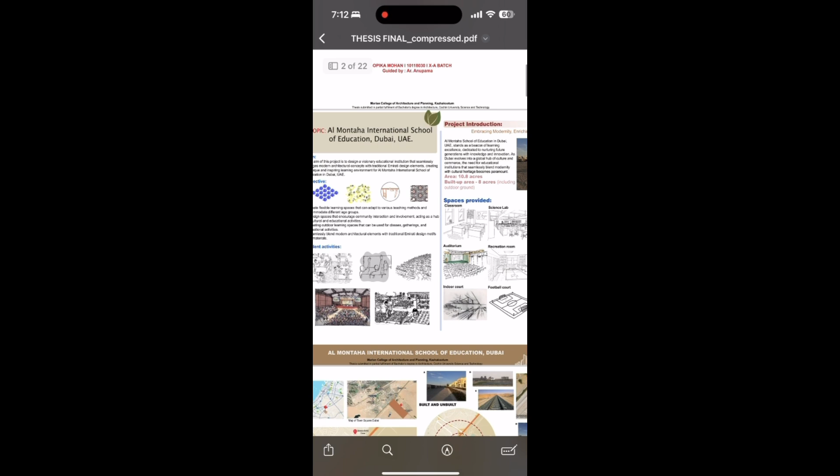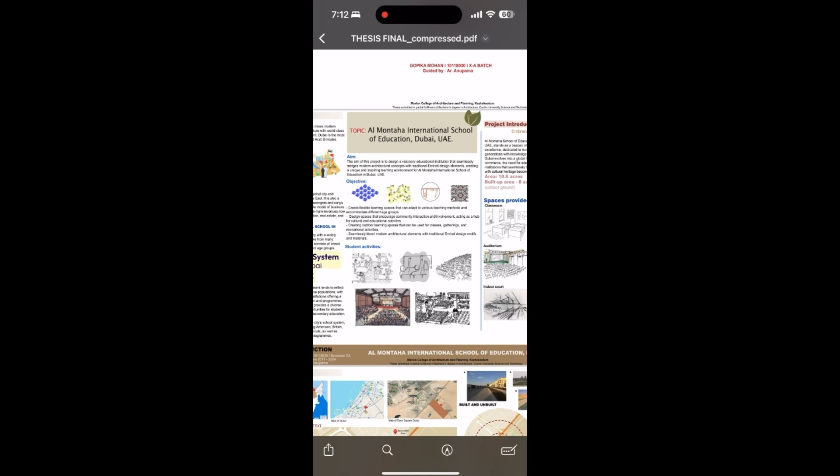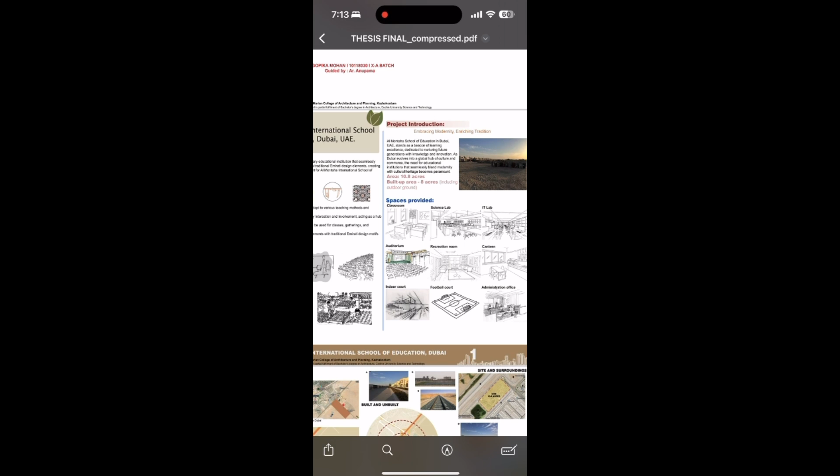In my project introduction, there are student activities going to the auditorium, doing curricular activities, extracurricular activities, sports activities, etc. My site is basically located in Town Square, Dubai, with an area of 10.8 acres, which can have a built up area of 8 acres including the outdoor ground. The spaces I'm going to provide are classroom, science lab, auditorium, etc., because these are necessary spaces for schools generally, as stated in the Dubai municipality rules.

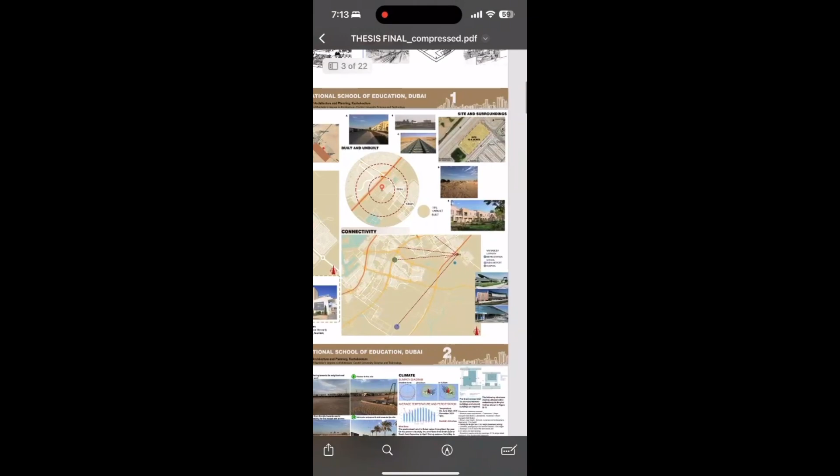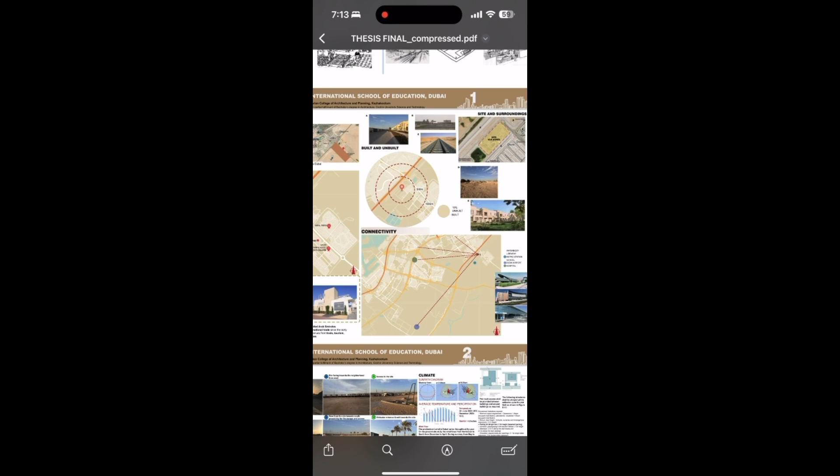Going to my site, as I mentioned, it is in Town Square, Dubai. There are two neighboring areas, that is schools with community villas and neighboring schools. My neighboring school is Southview School, Dubai, and the connectivity is really limited because the area is actually away from main Dubai. In future it will expand, and Town Square Dubai will be part of the main Dubai business.

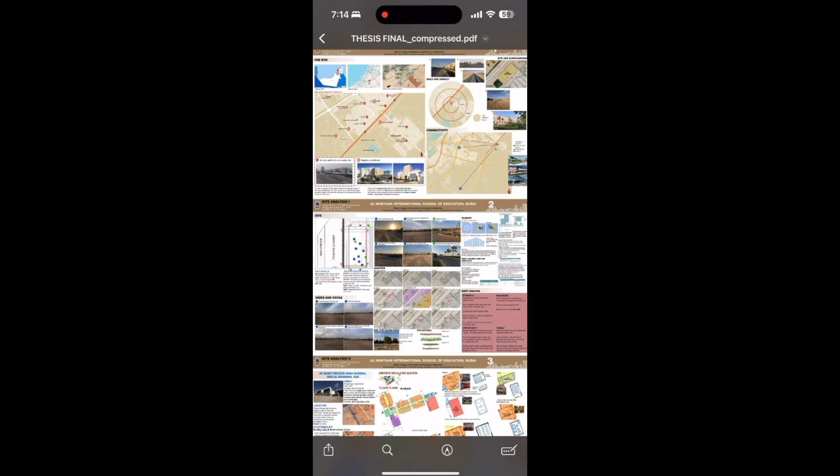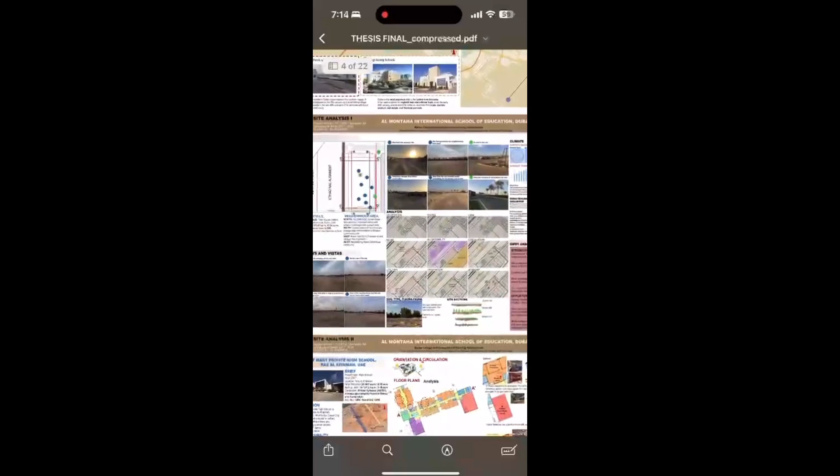Going with the site, my site is of 10.8 acres, and I have used 13,000 square meters of the building. Then I have done views and vistas, taking photos from the site. It is actually barren land, used as a temporary land for storing equipment, etc., even waste, though not too much.

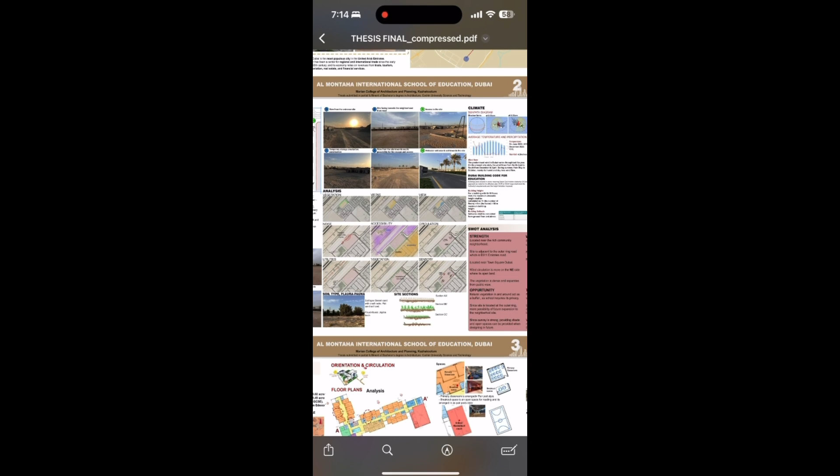My analysis is through vegetation, vistas, activities, etc., and the soil type is desert sand with small rocks, and the flora fauna is jojoba, the bush.

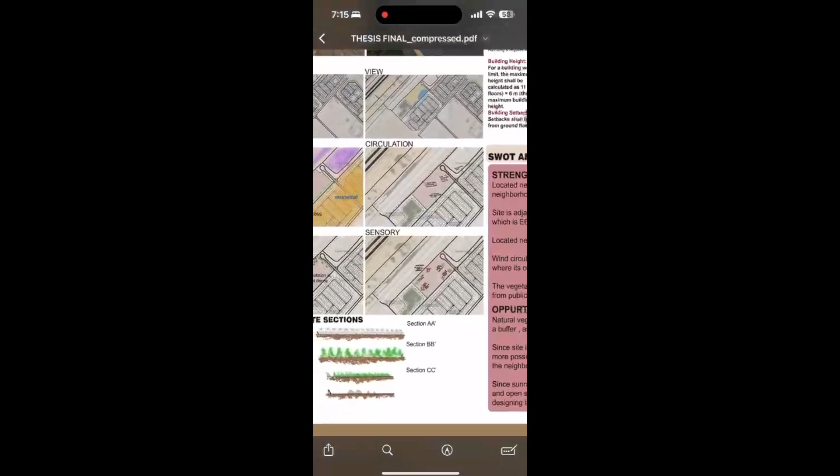These are my site sections, and the weakness or threat I have found is the noise from the east side, because on the east side is the main road, so we can hear the cars going here and there since it's the main road. In order to prevent that, we can do a lot of vegetation growing around, give possible future expansion on the neighborhood side, and also provide shade and open spaces to reduce the sun and the heat.

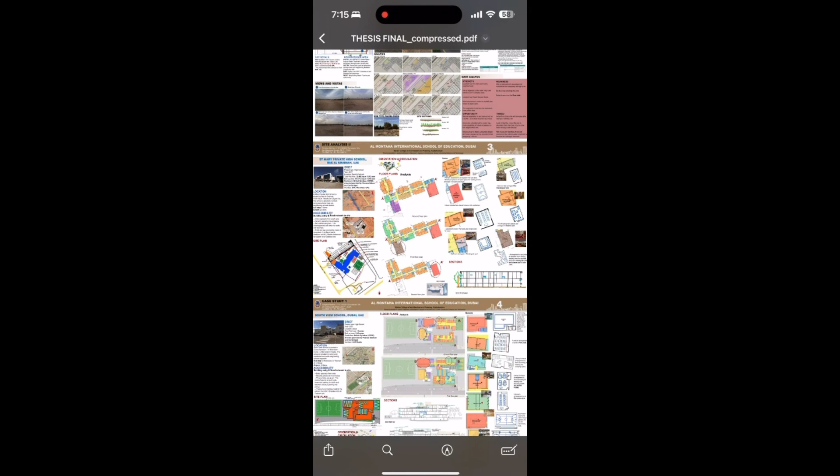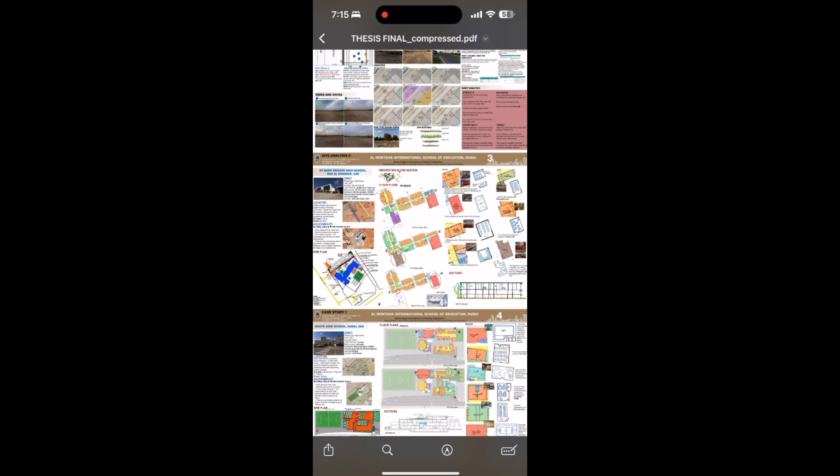So I have done two live case studies, that is St. Mary Private School in Ras Al Khaimah, and Southview School, Dubai, which is a neighboring school. From these two schools I have learned the spaces which are used, how many students can be sitting, how the furniture is arranged, and how the rooms are arranged according to class wise, age wise, etc.

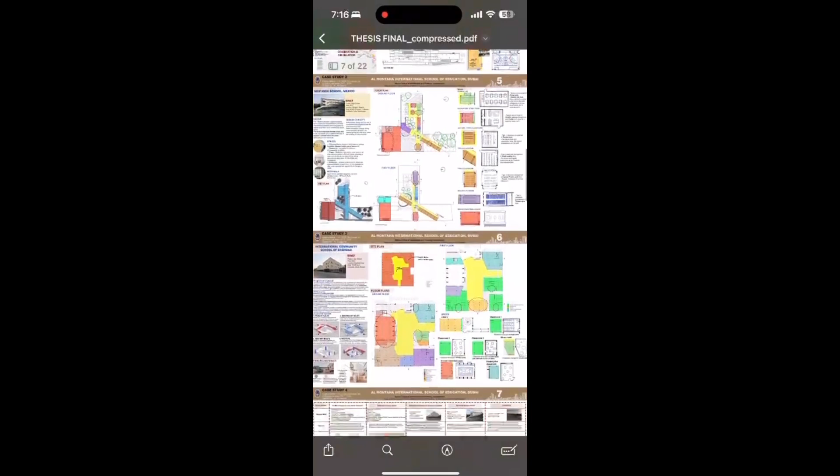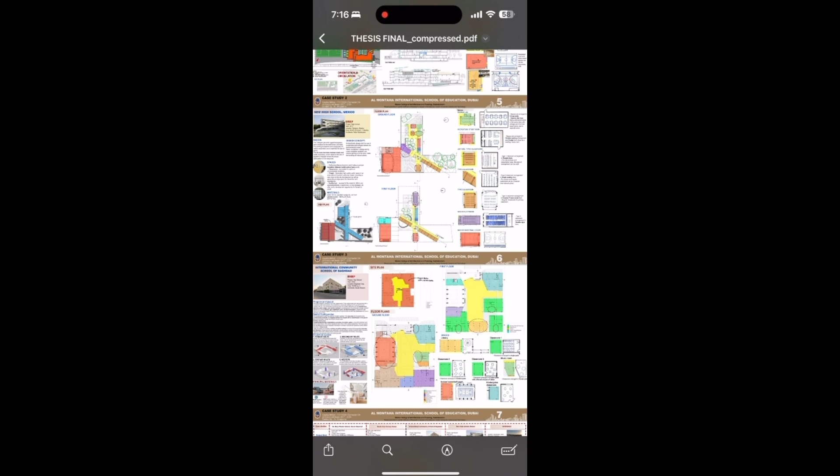Then comes the international community. I have done literature case studies on New High School, Mexico, and the international community, learning about the spaces and how the building is built up with the concepts. And then I have done the comparative analysis on all four of them.

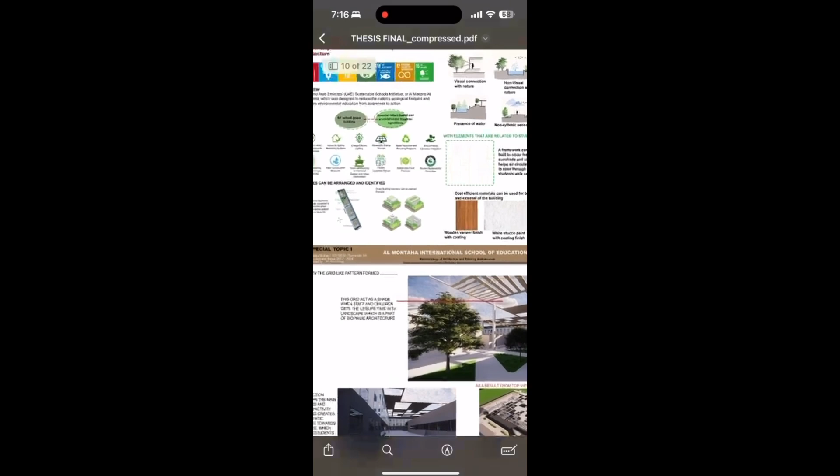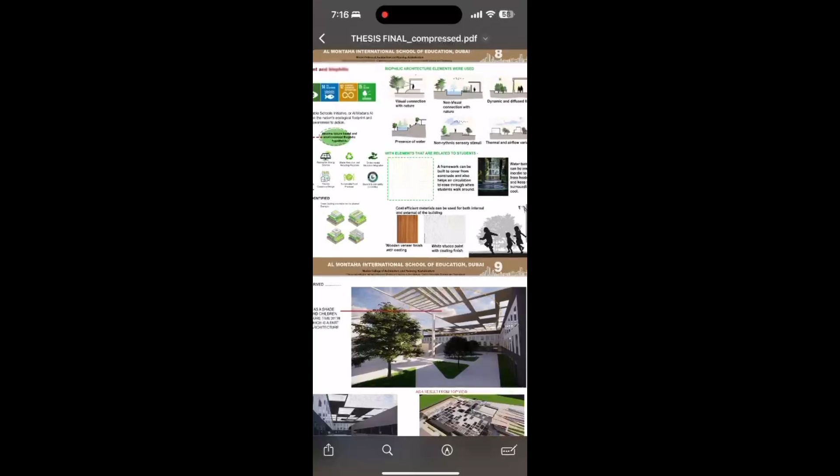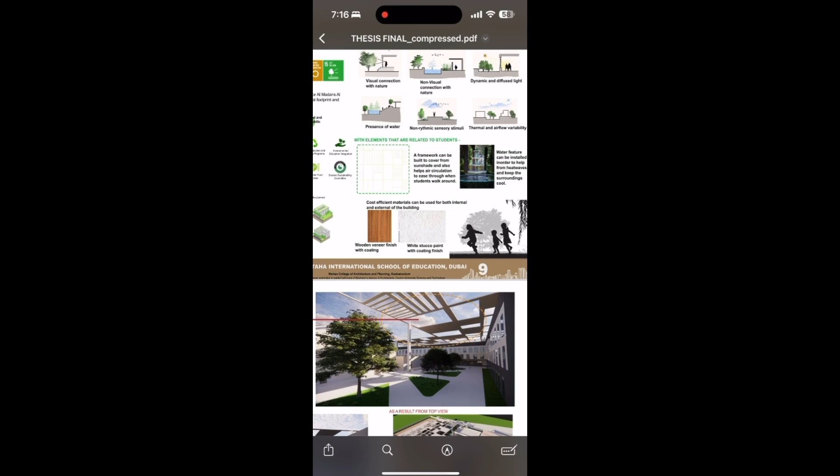Then comes my special topic, which is the relationship between student and biophilic architecture. For the relationship between these two, I have come up with an element which coincides with biophilic architecture elements. It is about using a framework which is a big pergola frame to help students interact with each other and get connected with nature and the surroundings.

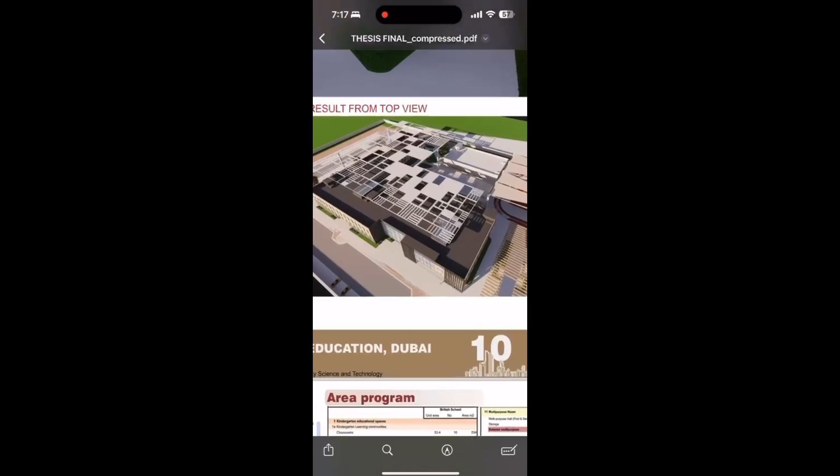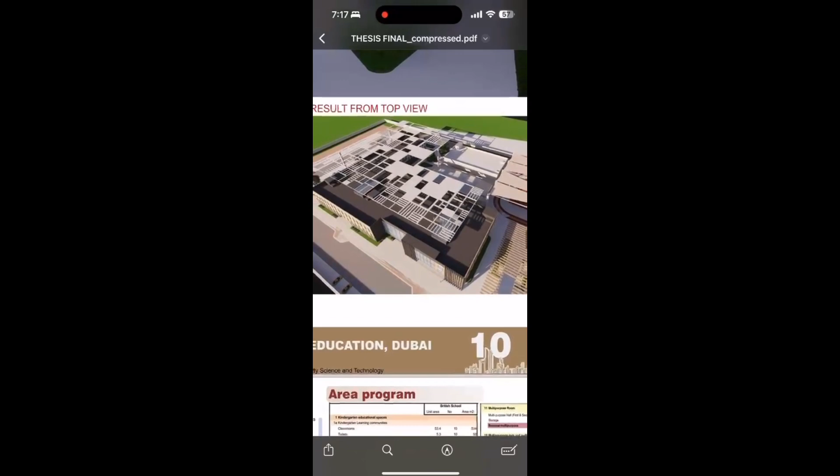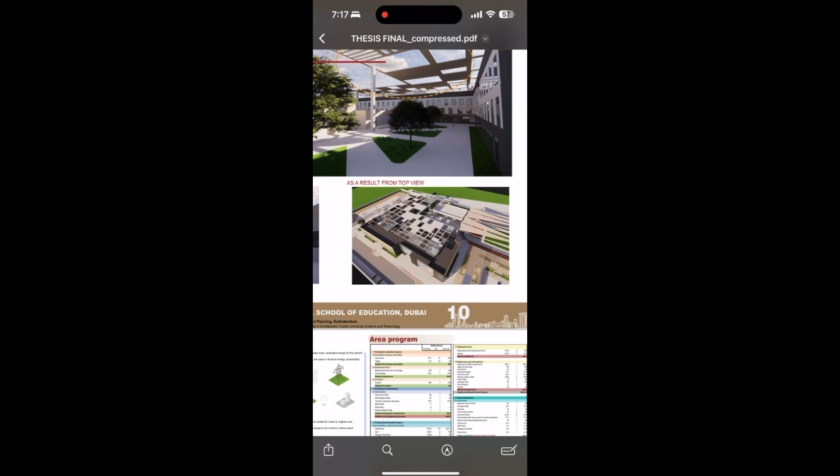In the model that I made, this is the framework that I have used. With this framework, it blocks the sun shade and brings cool air through the hollows that have been made to block the hot air and give cool air in between, because the wind is coming from northeast and northwest. So this is my special topic.

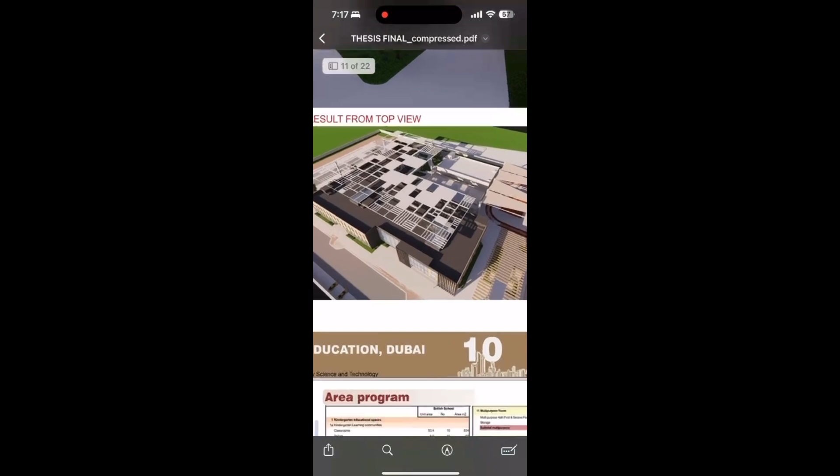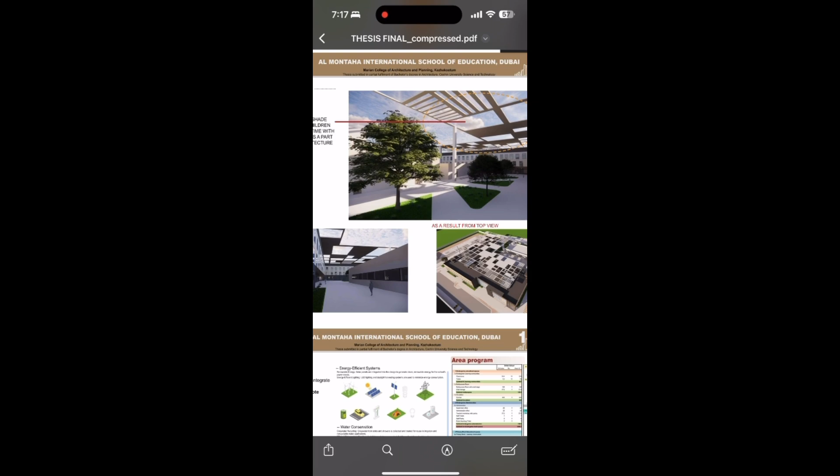So students will actually get interested in being at the center of the core, since it's at the core area, and also the nature blends with it. So students will love to have a leisure time, and not just students, even the teachers will also love to have a leisure time with their students, and students can also have their recess time.

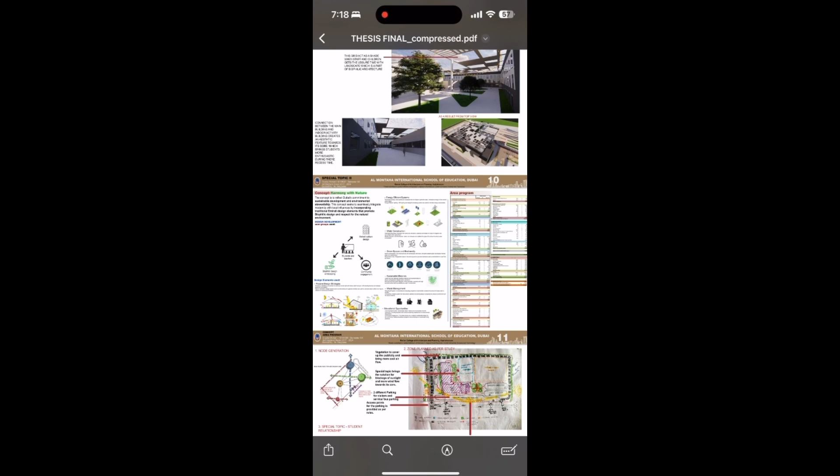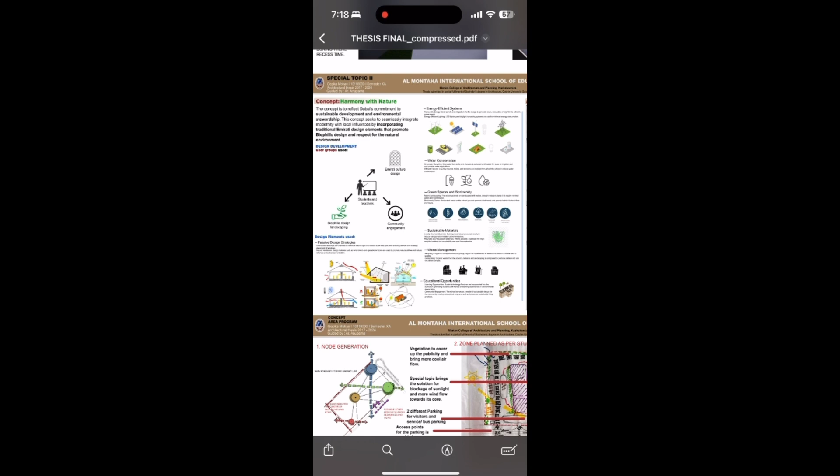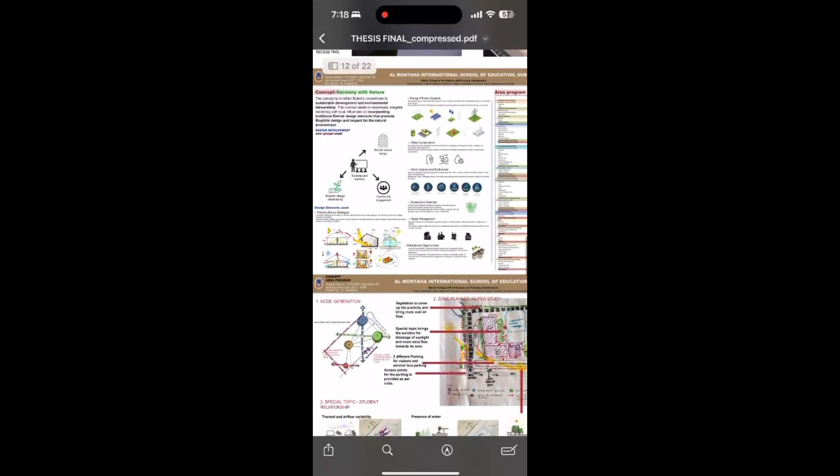And my concept is about harmony with nature. Since it's harmony with nature, I've used design elements, that is the passive design, the sustainable design, green spaces, water conservation, energy efficient systems. Since the building is fully air conditioned with HVAC, certain rules have been taken up, and it is mentioned in the data collection.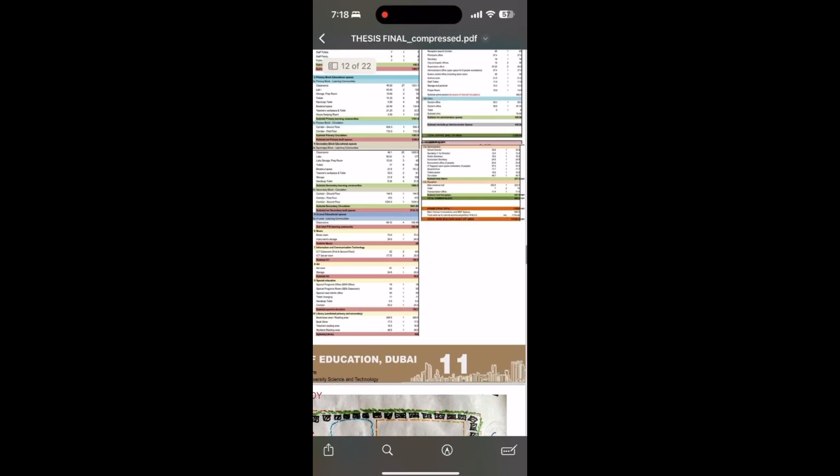And my area program, as I have said before, it is 13,000. I have used the built up area as more than 13,000.

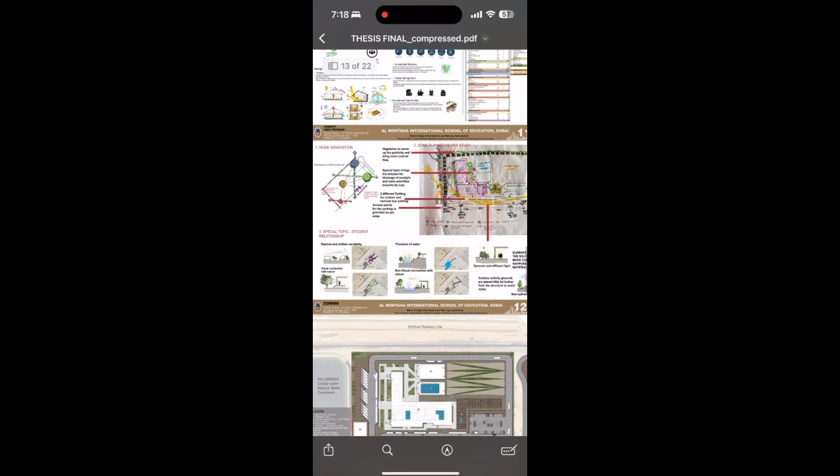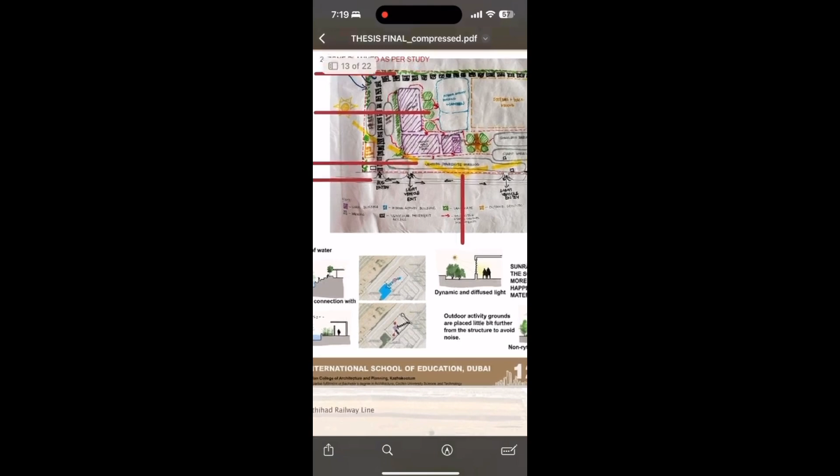And then comes my zoning. So during zoning, this is my node generation. I found that the core area is where students and teachers can have the time, and also use a special topic to bring the blockage of sunlight and heat waves.

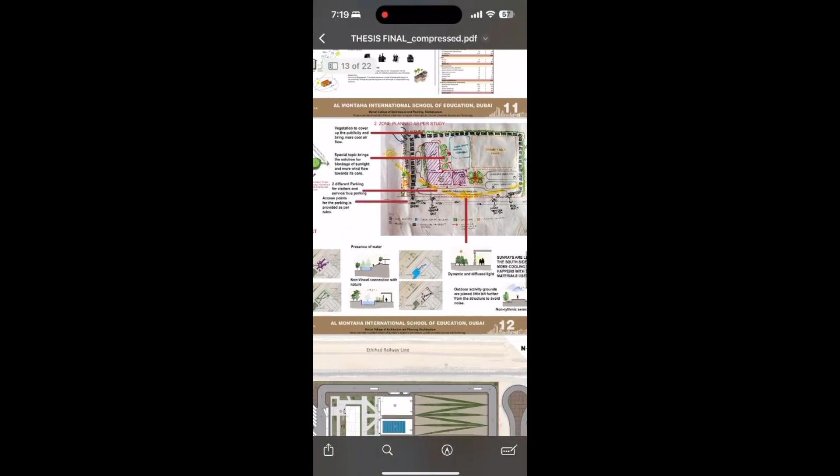And give more fresh cool air. It also reduces the heat when we use the elements on it. So this is how I have analyzed with the biophilic architecture elements, and this is how I have came up with my zoning. And then here comes my master plan.

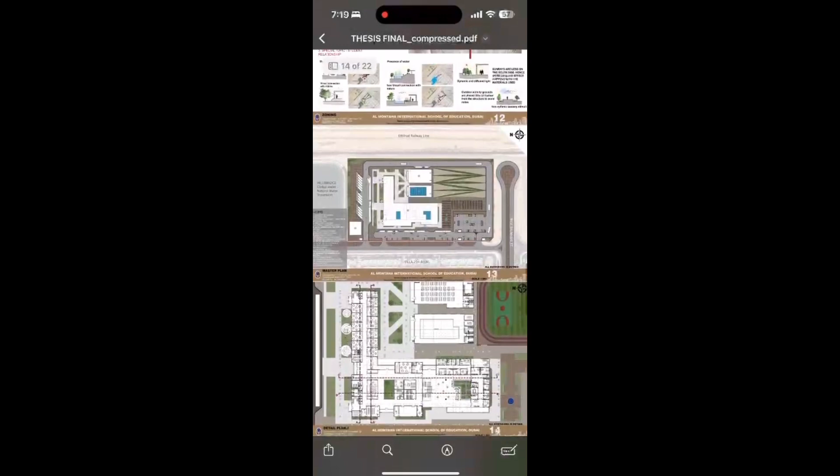So this is my master plan. I have actually systematically made it happen rhythmically, so confirming that this is the core area where the space framework comes.

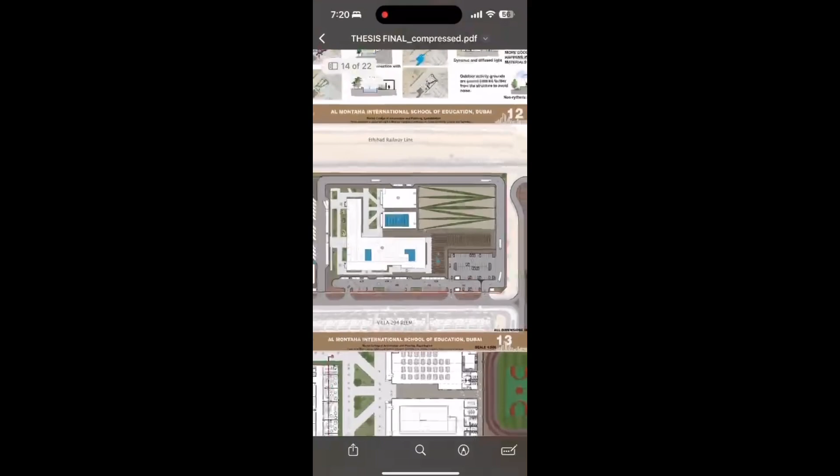I'm sorry about that, the file is a bit huge. Yes, so this is the football ground, and these two buildings comes the indoor activity building, that's the swimming pool, canteen, and gym auditorium area.

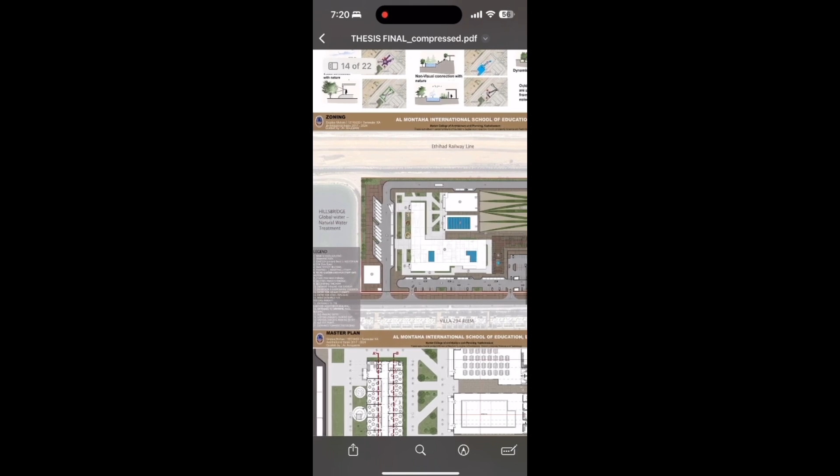And this is the main school building for all the classrooms and staff rooms, and where all the activities happen inside.

This is my first floor plan. This is my ground floor plan. So my ground floor plan is basically for the kindergartens, because by the rule we have to give kindergartens the first priority, because they need priority.

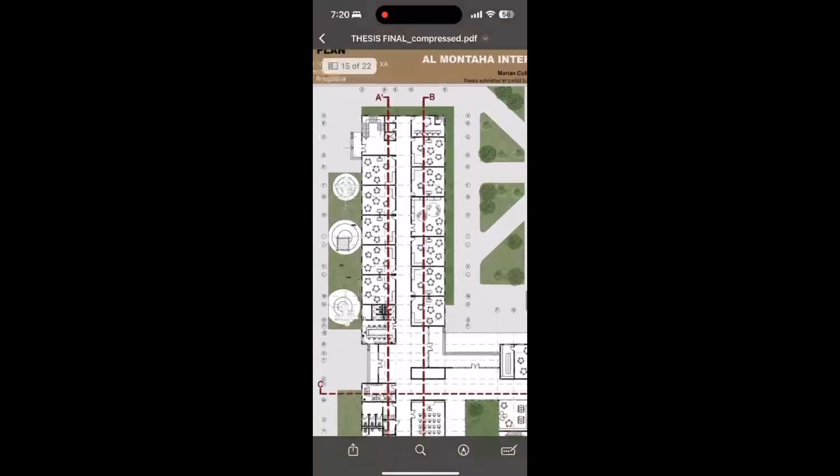And also giving an IR room was also necessary, and also the indoor playground room, play area room. And in one class, 25 students as per Dubai municipality rule.

And then there's a common toilet for the students, and there are common toilets for the staff room and IR room.

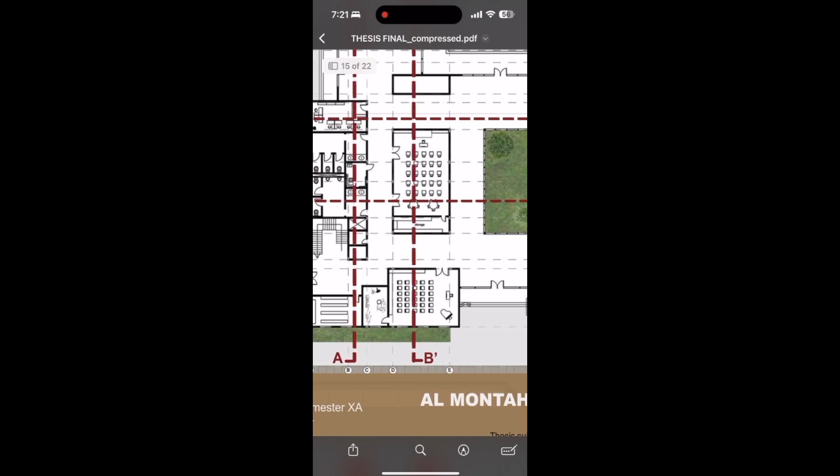And this is the language room, where they learn languages all together and also have other activities. And here's the music room, and they can come and learn music. And then they have the art room, and also they do have IT lab room.

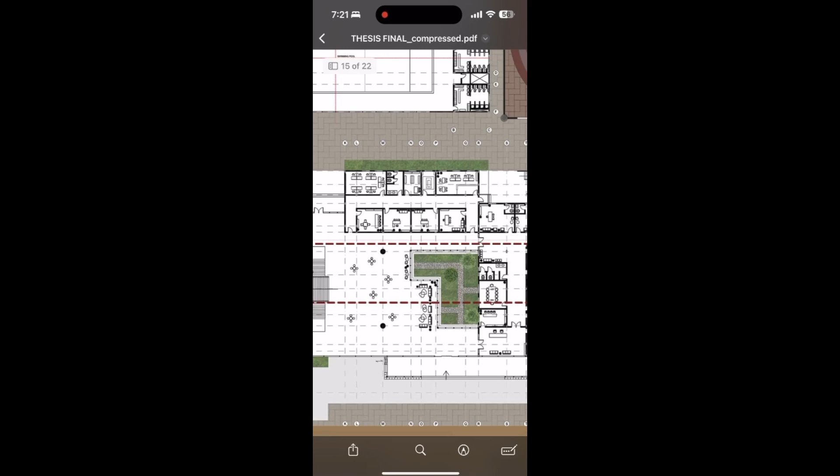And this is the server room where it connects the IT lab. And here comes the reception building, and this is the administration building where every admission process happens, even the exam control area happens.

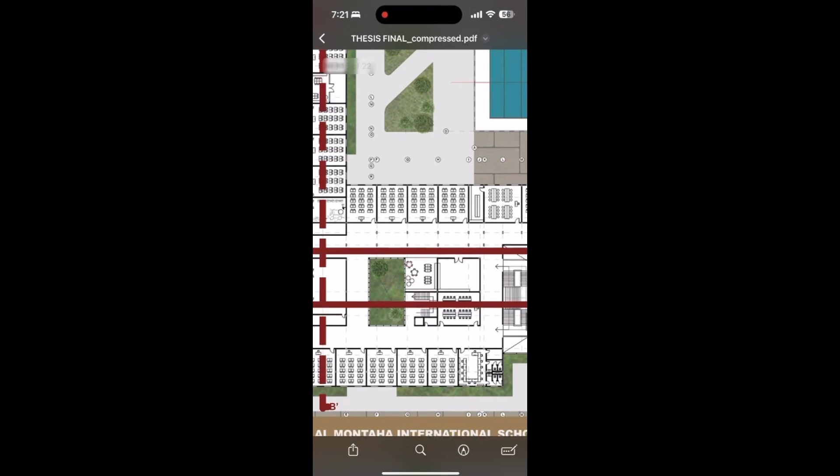So moving on to first floor. There the classes are from 1 to 6 with each strength of 30 students as per the rules. And they also have leisure time at the center, also multi-purpose rooms, and 2 staff rooms are given.

Since it is a bit wider, the classes are a bit wider here and there. So yes, that's how I conclude.

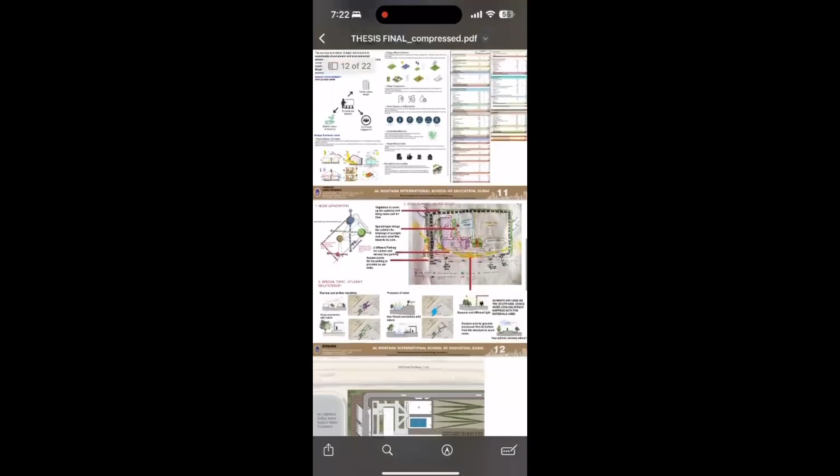And then comes my second floor. My second floor consists of classes from 8 and 9, till A level classes. A level class is 10th and 12th, 11th and 12th classes. So they have 5 classrooms in total.

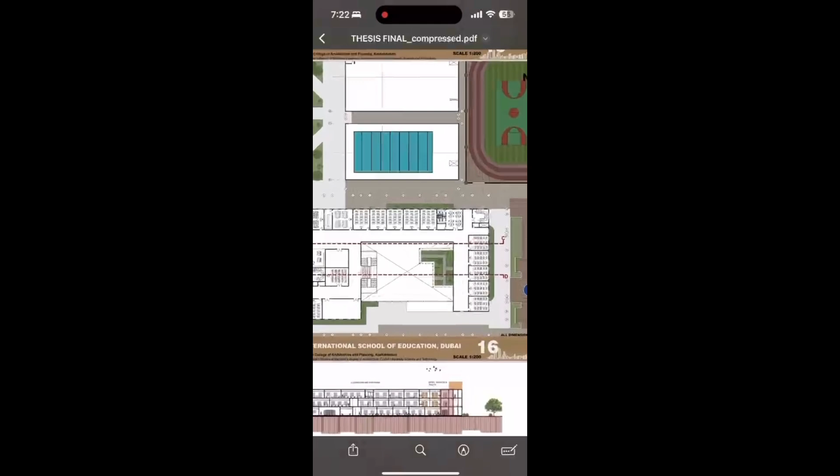Yes, and there's a central staircase connecting from the ground floor at the center of the building to all the floors where they can access, and also there's a fire exit on the right hand side.

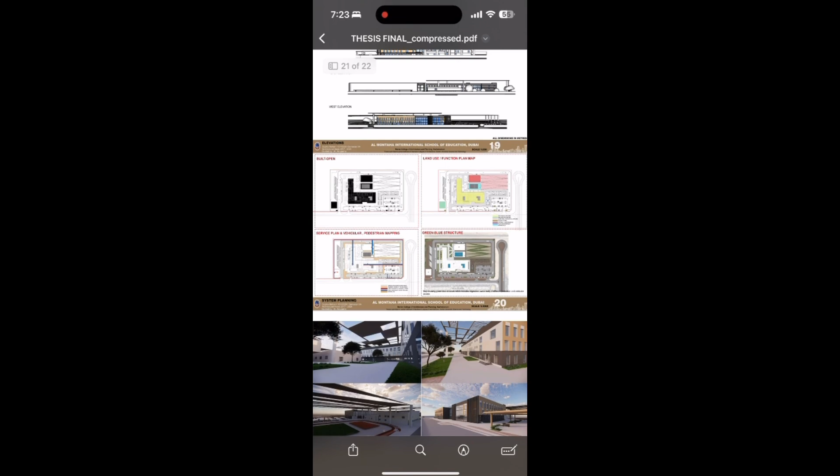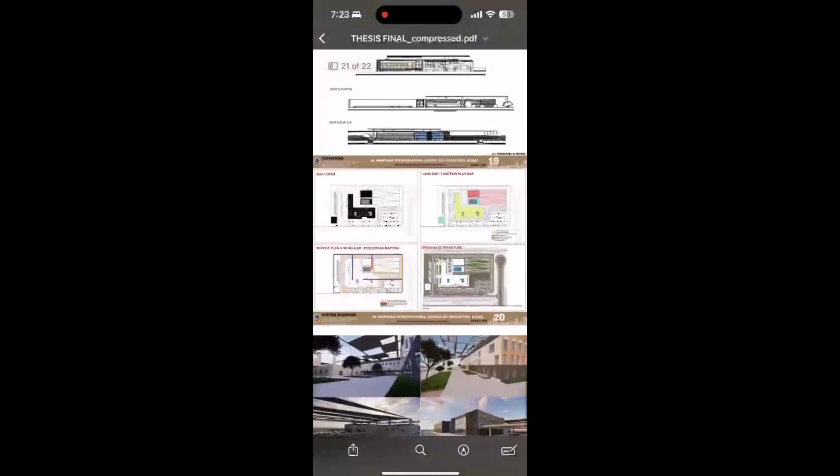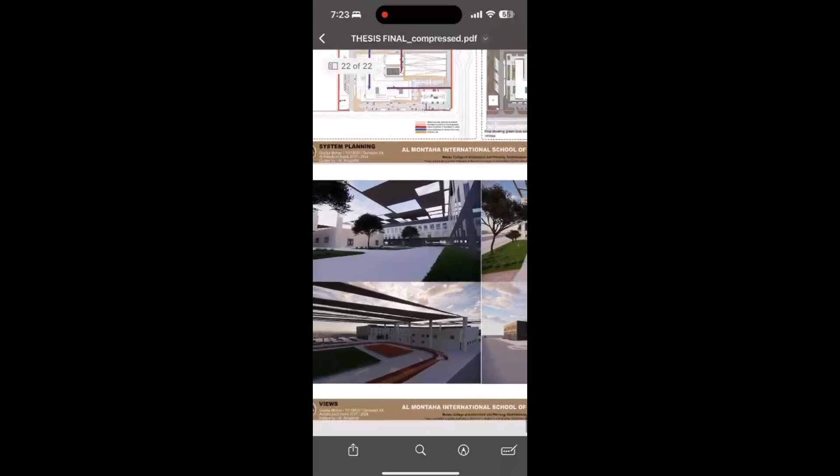And here comes my elevations, and this is my system planning that I've done. This is how the service plan gets the electrical, water and sewage plan connected, and this is the green blue structure, and also land use and built open.

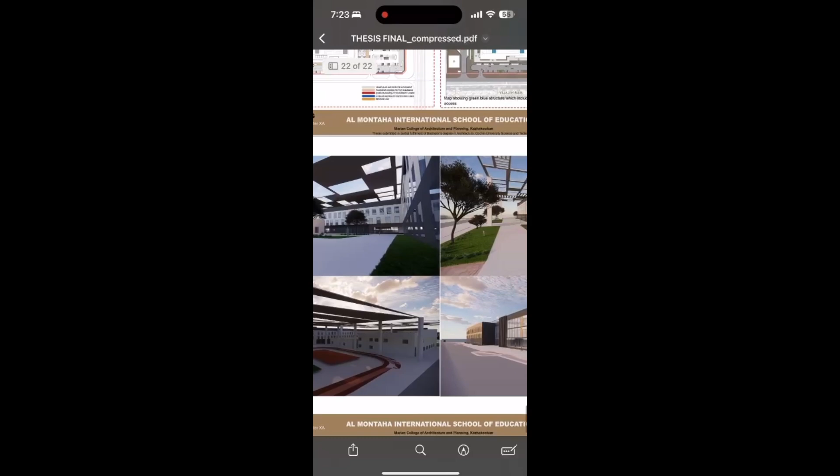And this is how I conclude with the views. So this is what I was talking about, relationship with the students with this space framework. And this is the ground that I've said before. This is the ground.